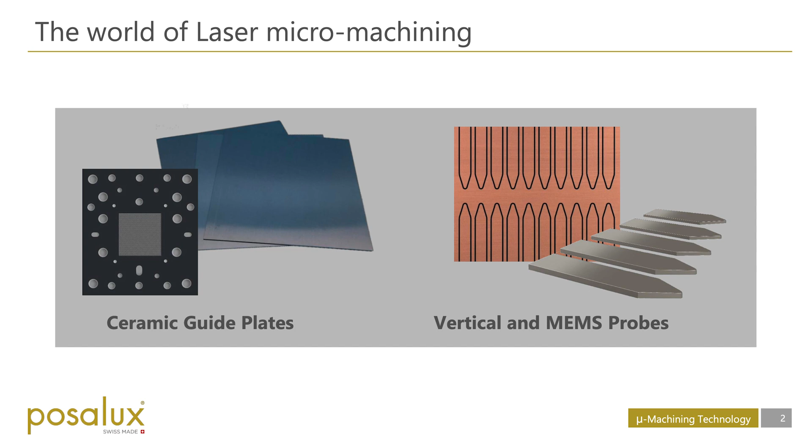Here you have an overview of today's webinar. I'm going to start with a quick introduction, then technical specification, the state of the art today, and what the industry is requiring to get a good and qualified product. I will spend time to explain what a femto-laser is.

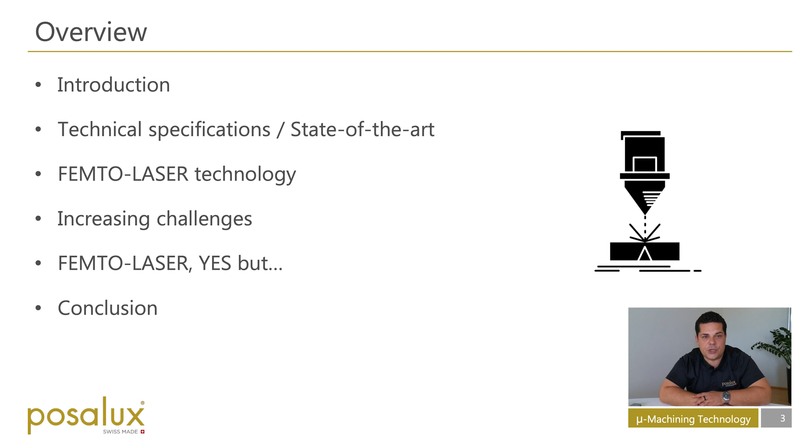Then I will discuss the increasing challenges and the work done by our application and R&D people. After this, I will go back to the initial question, to understand if femto-laser is really enough to cover the actual and future needs. The question is: femto-laser, yes, but—and we'll see what are the other essential elements. Then I will finish with a quick conclusion, making sure the initial question gets an appropriate answer.

Ceramic guide plates processing by laser is well known in the industry. We have also seen a tendency to cut probes also by this process. Why does femto-laser help to achieve increasing challenges? Again, all along this webinar we will understand if femto-laser is enough to cover all technical requirements, actual and future.

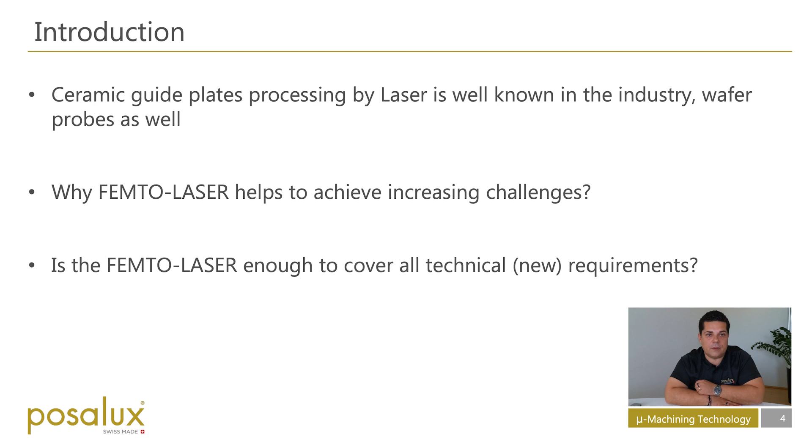Now, technical specification and the state of the art for guide plates. Here we can see the main specifications for drilling and what must be achieved: round, square, and rectangle holes, dimensions down to 20 micron or less, corner radius if possible less than 3 micron for square or rectangular holes.

Another important spec is orthogonality. We can see here in the picture an example—it should always be between 89 to 91 degrees. And surface quality: homogeneity of the hole and the hole quality, and by homogeneity and quality of the surface we mean the roughness of the surface.

To avoid any functional problem with the guide plates, there must be no damages and no micro cracks. There could also be additional requirements, but here we talk about the most important ones.

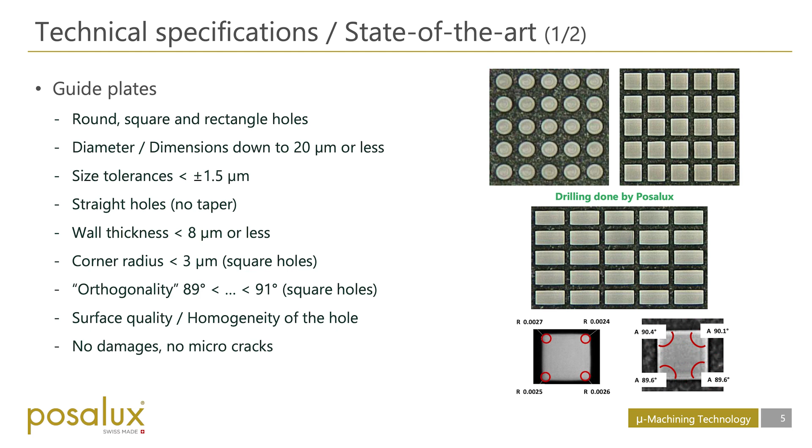Now, technical specification about vertical and MEMS probes. I announced at the beginning of this webinar that the tendency to machine this kind of probe by laser is increasing. Here we can see the most important specifications. We start with size tolerances, which must be less than plus minus 1.5 micron, with a minimal width down to 15 micron.

Here is an example, but we did it in our R&D—this work to reduce the width of probes, where we actually achieved 15 micron, but of course it can also be less with femto-laser.

A criteria to evaluate a good result is to check the cross section, and you can also see here in the presentation the cross section of the probe—check the symmetry and check the taper. Here we have a clear example of what passes and what fails in terms of geometry, in terms of cross-section evaluation.

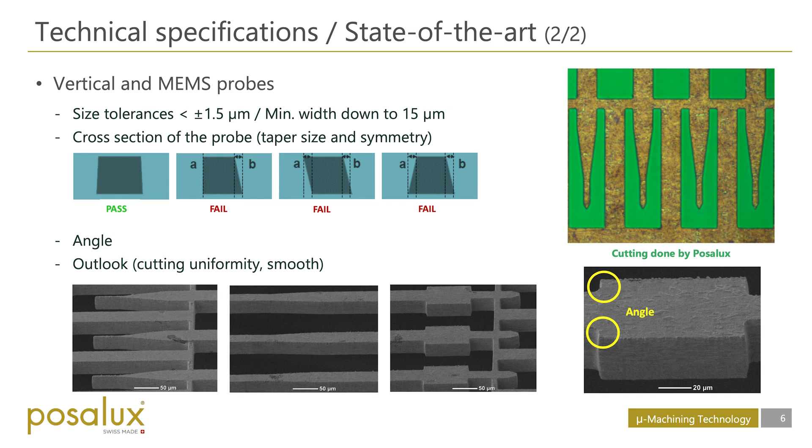A sharp angle is also important to keep the probe correctly positioned during the test. This angle should be as small as possible, but generally should be less than 5 micron. Last but not least, the outlook after probe cutting is also a very important criteria or specification—the cutting uniformity and smoothness is a key point as well.

So let's deep dive into the femto-laser technology. What does femto-laser mean? A femto-laser is a laser which emits optical pulses with a duration well below 1 picosecond, in the domain of femtoseconds. This also belongs to the category of ultra-fast laser or ultra-short pulse laser. In the picture here you can see a comparison between a long pulse laser and an ultra-short pulse laser.

For long pulse laser like microsecond or nanosecond laser, the main issue is material integrity. You can see in the picture some ejected material, damaged surface, heat affected zone, melt zone, micro cracking, which are not present in the ultra short pulse laser process. You have no debris, no damaged surface, no melt zone.

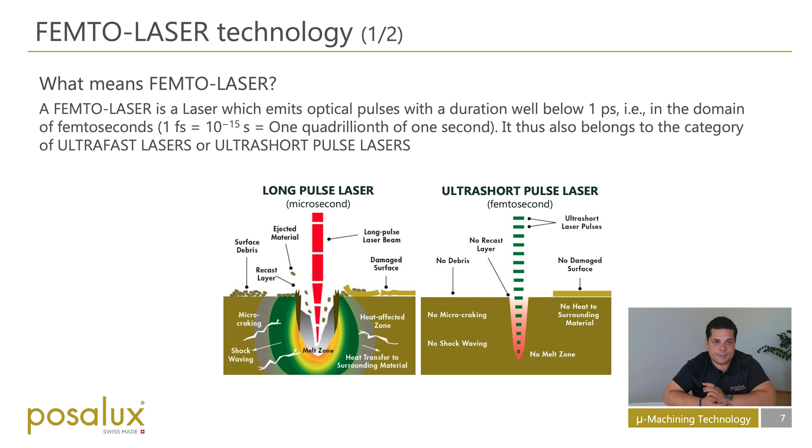So we can say the femto-laser is like a cold ablation process. The pulse duration of the laser is the key parameter to achieve a non-thermal process. The maximum pulse duration to avoid thermal effects is dependent on material. Generally a pulse duration less than 500 femtoseconds is okay for most materials. Here we can see the difference between ultra short pulse, less than 500 femtoseconds, and long pulse laser, higher than 500 femtoseconds.

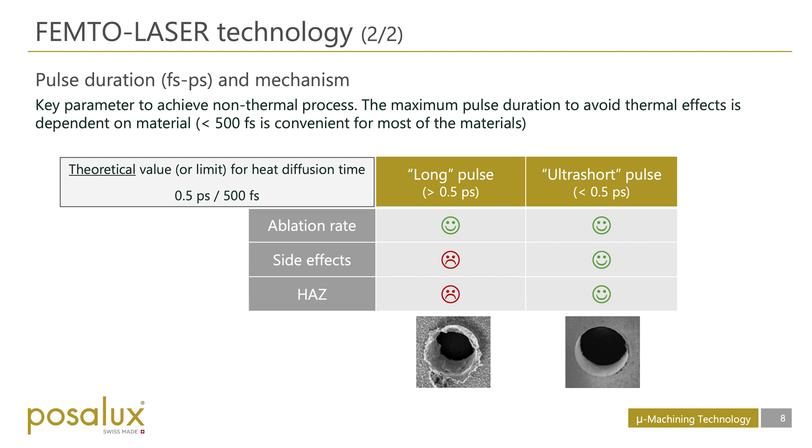Three criteria: ablation rate, side effects, and heat affected zone. Ablation rate is okay for both long and ultra short pulse, but what makes the difference between long and ultra short is related to side effects and heat affected zone. And here clearly we can see this also through the pictures.

Now that you have a better understanding of what a femto-laser is and also what are the specifications, let's talk about challenges. Here we put some points which we also worked out with our application team, and which are also representing the tendency of the market and what we will need in the future.

First, the increased number of holes per guide plate. We did a test where we drilled more than 100,000 holes with reduced pitch, meaning a wall thickness less than 8 microns, down to 8 microns.

Second challenge, the productivity. When you have a lot of holes to be drilled, like more than 100,000, the productivity is very important. We are talking about several days of production, so if we can reduce the production time, this is also very important because it will reduce the cost.

The repeatability, reproducibility, and consistency of the hole quality. We run several days of production in a row, so it is important to have the same quality of the hole from the beginning. The first hole we drill and the last hole we drill must be the same. We must achieve the same quality and consistency.

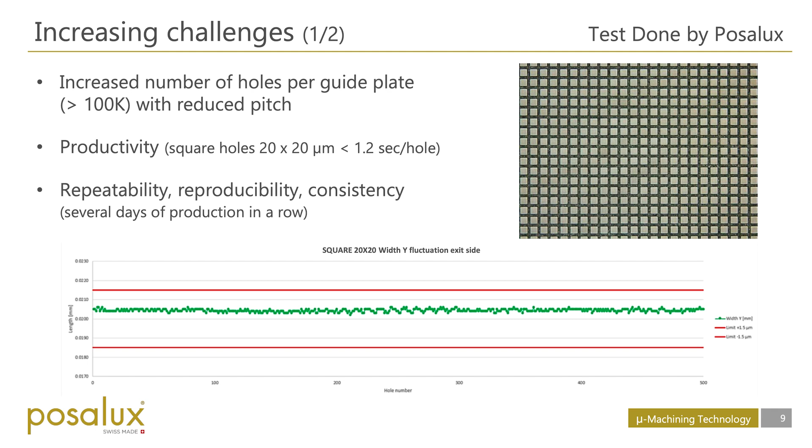What is very important is also the high positioning accuracy. Here we have a process accuracy within plus minus 2 microns. This is also the tendency, to reduce and make sure the positioning accuracy is stable and very small. Plus minus 2 microns is a challenge, but it is already running into production.

Stability and reliability is also something that will be part of the challenges. We are running 24/7, so again we can couple this with the consistency we just talked about before. The stability is very important.

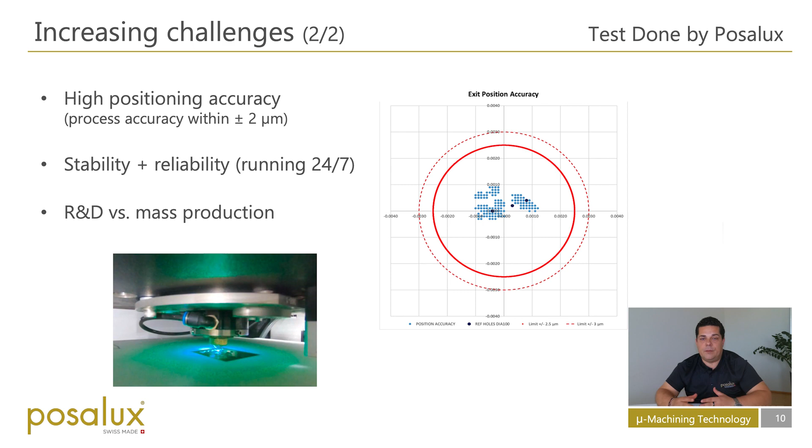We also have to distinguish between R&D and mass production. All what we are doing in R&D is very important. Then we apply for mass production, but it's not just applying what we did—it also requires some experience, preparation, and adjustment to make R&D match with mass production.

To sum up, the femto-laser really helps to achieve challenges in terms of productivity and surface quality, but it doesn't cover all the challenges mentioned before. Some other components are essential to reach a higher level in application.

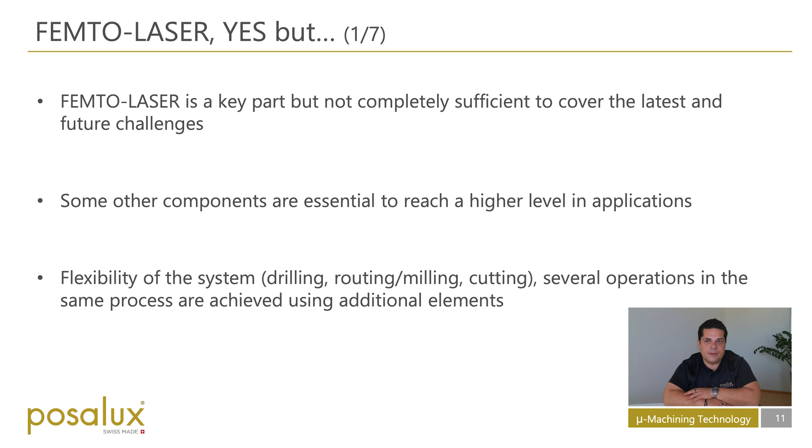Flexibility of the system—we need drilling, routing, milling, and cutting. Several operations in the same process are also achieved using additional elements and not only the femto-laser. Femto-laser, yes, but a precession head is needed, in other words an optical 5-axis beam management system.

So the technology, as shown here, shows the comparison between conventional laser drilling and the 5-axis drilling, where you can see the laser beam can be tilted, can be moved, following 5 optical axes: X, Y, Z, and incidence angles. Thanks to this, some specific geometries can be achieved.

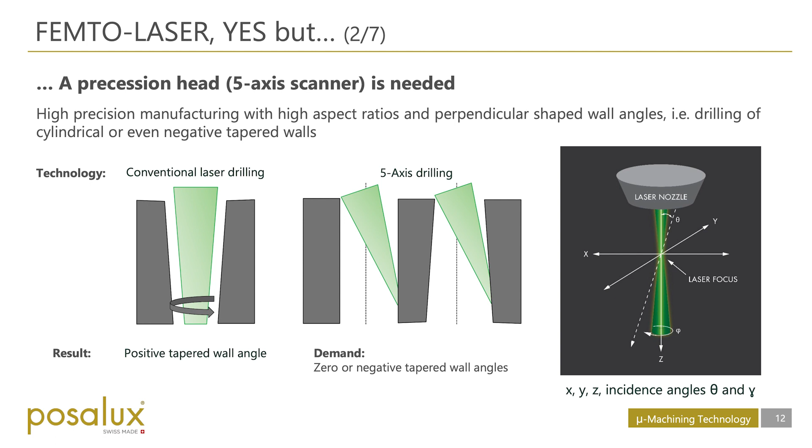Here we can see 0 or negative taper, straight holes. This is all managed by the 5-axis scanning head. FEMTO-LASER, yes, but a precession head is needed. The laser is moved helically with tilted laser beam.

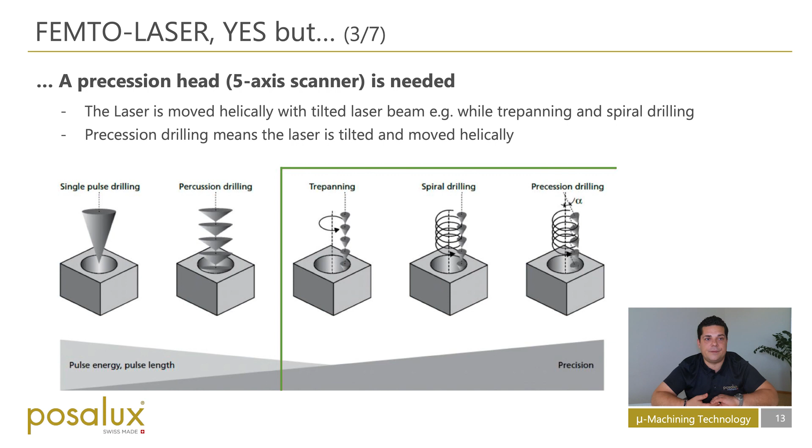In the picture here, we can see from the left to the right side the complexity of the laser and beam management system, since a single pulse to a trepanning and go until the precession drilling, which is the most accurate in terms of optical axis movement, and you can achieve all kinds of shapes, all kinds of geometries.

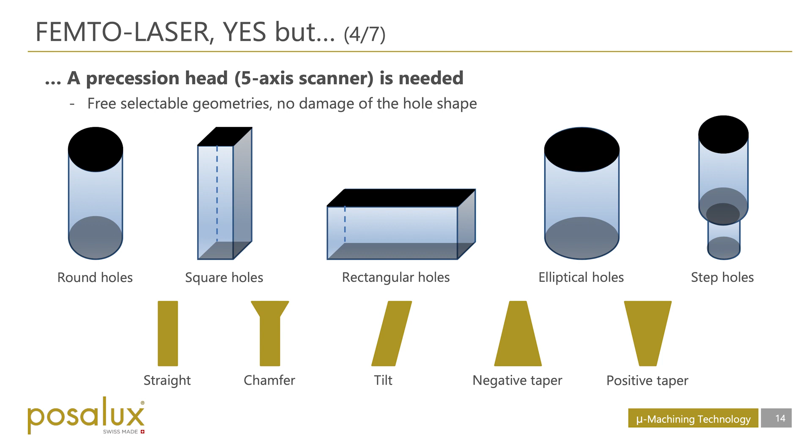FEMTO-LASER, yes, but again, a precession head is needed. Here we can see free selectable geometries, and you have no damage of the hole shape. And somewhere all the spectrum of the holes and geometries we can achieve: round holes, square holes, elliptical holes, step holes, and in terms of geometries, the straight, chamfer, tilt, negative and positive taper holes.

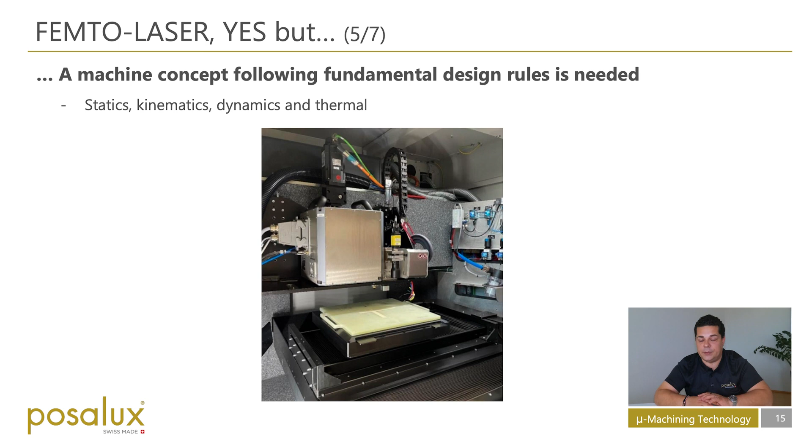FEMTO-LASER, yes, but a machine concept following fundamental design rules is needed. And here the most important points are all related to the statics, to the kinematics, dynamics and thermal behavior of the equipment, in its global behavior.

When we talk about a machine concept following fundamental design rules, as I told before, the static behavior must take into account the efforts of the machine.

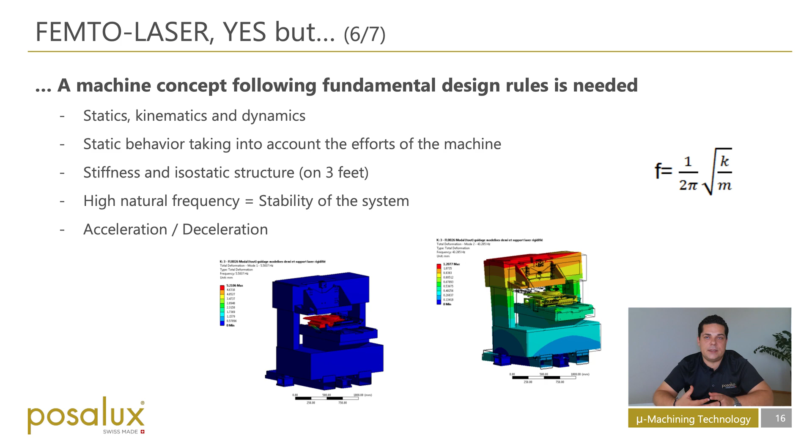We are using stiffness and isostatic structure on 3 feet, so it makes all the machine, all the equipment very stable, and the stiffness is there. We must make sure, according to this formula, the high natural frequency is the same as the stability of the system, and we have to take into account all acceleration and deceleration of the axis to make sure the stability is there.

FEMTO-LASER, yes, but of course, again, a machine concept following fundamental design rules is needed. As we all know, the tolerances are getting tighter, and so the long runners means an equipment which is running for more than 24 hours, like I showed you before, the example of 100,000 holes.

We need a few days to complete production. So the long runners require long-term stability. It means, for example, we have 20 degrees, and all along the production, the stability must be guaranteed, in the environment of the machine, but also internally in the machine.

This is very important to keep the stability all along the production. The choice of materials is also very important, here the choice of the material for the structure of the machine. For example, we have the XY table in granite, which is the same material used for the structure. We have an active air conditioning system to keep all the temperature very stable during the production.

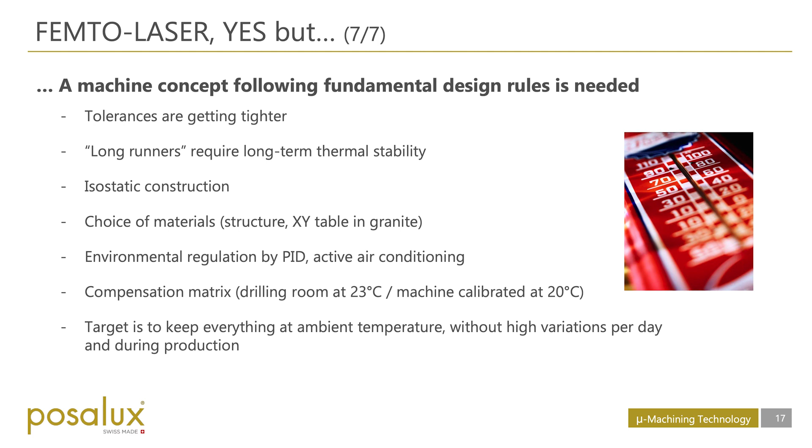All along the webinar, we have seen the benefit that FEMTO-LASER is bringing to the production, but we also learned that it's not the only key point to achieve the increasing challenges for the future. So we need a combination of different components, and here we show that using a 5-axis optical scanning head is also something very important. To build an equipment, to build a machine according to the state of the art is also a key point, and that all the three we have seen during this presentation.

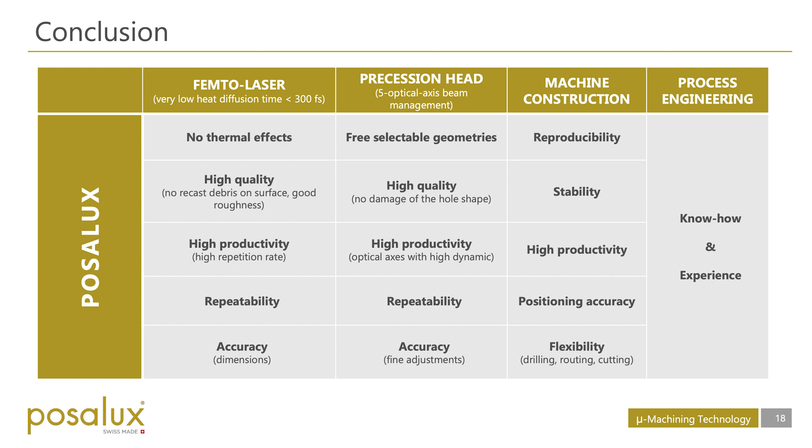We also showed you the way where our application engineer developed some jobs, for example, to run more than 100,000 holes with a high stability of result. This is a combination of all the three elements we have seen before, but it is also a point related to know-how and experience we developed all along the last 5-6 years.